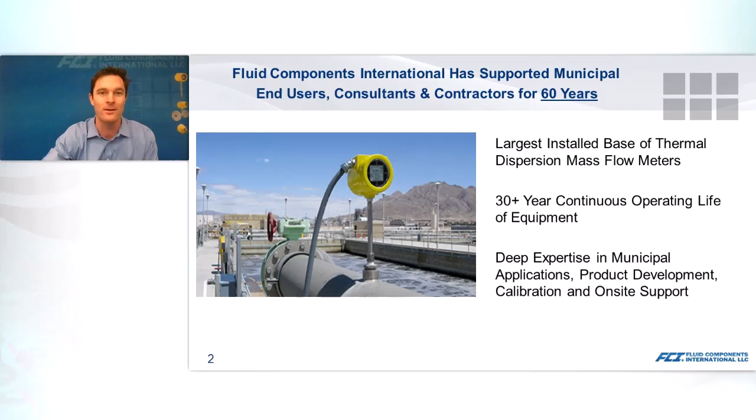So there's FCI in particular. I would say that the thermal mass flow measurement in general, regardless of the manufacturer, has become a very popular option in the municipal industry. You think of those bread and butter applications that are used in municipal, your aeration, your anaerobic digesters, anything that has to do with biogas, natural gas, combined heat and power, flares, odor control. The application list goes on.

Customers, engineers, consultants like to specify thermal in general because, as Travis pointed out, it does give a direct mass flow measurement without compensating instruments for pressure, temperature, flow computers, has a very good, reliable performance in low flow and a wide turndown range. The standard of that is 100 to 1, but with special calibration techniques can go as high as 1,000 to 1. There's no pressure drop.

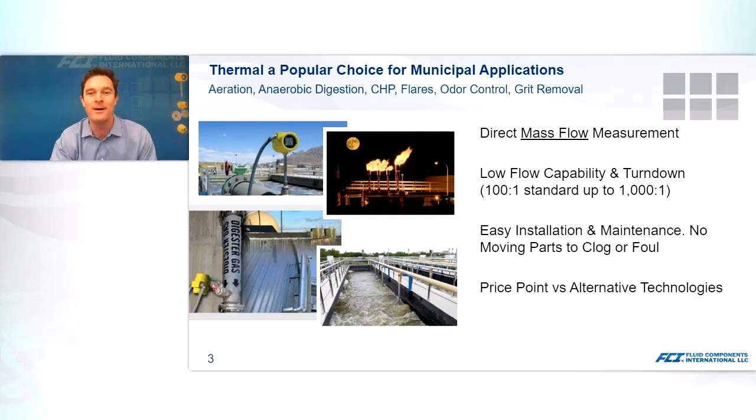There are no moving parts with thermal instrumentation that could clog up or foul. Easy to install and easy to maintain. And the price point of thermal compared to some of the alternative technologies is quite competitive. So thermal has become a very popular option in municipal in particular.

Now, before we can discuss wet gas and the frustrating problems that it causes and how to approach them, you need to understand just a bit about our theory of operation and how thermal dispersion works. So what you see here are two photos of our instruments. The flow meter on the left is our insertion instrument, and that is for line sizes 2 inches and above.

The instrument that you see on the right is our inline, and that's for line sizes 2 inches and below. The main concept that we have is we have two thermowells on our sensor head, and within each of those thermowells are platinum plated PT1000 RTDs measuring temperature.

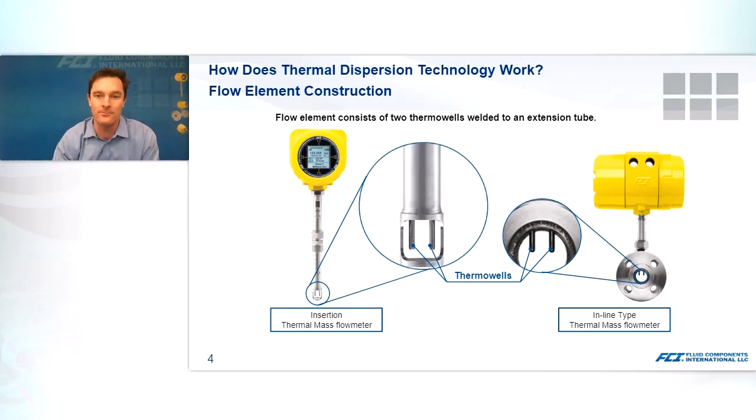Within one of those thermowells, we bring extra heat to the RTD, and that is called our active sensor. And the other one, there's no heat brought to that. That one's just measuring the temperature of the media as it flows by. That's our reference sensor. So two RTDs, an active sensor with heat, and a reference sensor. And at any given point in time, there is a difference in temperature between those two RTDs, and that is our measurement signal.

Now, moving on to how it works in particular, the concept is all about the molecules. It's all about the molecules. So on the left, you see our sensing element. The red is the heated sensor. You have your unheated sensor, and then that delta T represents the difference in temperature. On the right, you see a little bit more dense of a situation. And each one of those dots there is a molecule of the gas that we're measuring. Now, that could be biogas, it could be compressed air, it could be hydrogen, it could be a blend of a lot of different things.

And each one of those molecules that is hitting that sensor head has its own unique cooling effect and is taking away heat. Now, the more of those molecules that hit the sensor head, the more heat will be taken away. And the velocity, the faster that those are moving, the more heat will be taken away. This is the central component of how we work. You have the cross-sectional area of the pipe. You have the density or the pressure, which is how many of those molecules are hitting the sensor head and taking away heat, times your velocity. How fast are they moving and how fast are they taking away heat? There is a direct correlation between that difference in temperature and the mass flow of the media.

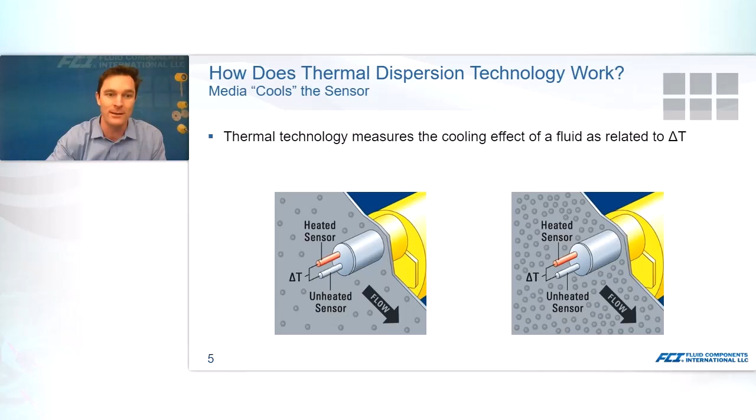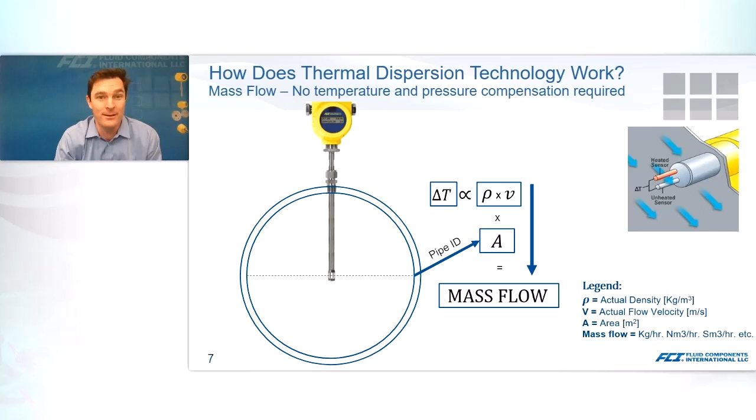Now, because our theory of operation works this way, and looking at the formula for mass flow, which I would say is your density times your velocity times the cross-sectional area of the pipe, and given that we're measuring off of the cooling effect of the media being measured, there is no need for additional compensation for either pressure or temperature or a flow computer. As we said, the number of molecules that are hitting the sensor head is how we make our mass flow measurement. So with that, no need for a pressure instrument, no need for a temperature instrument, and no need for a flow computer.

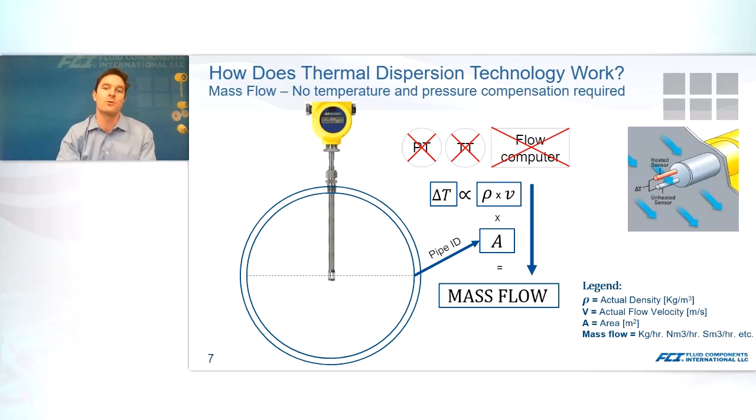Now, as I said, there is quite a bit of upside to using thermal in general in quite a few of the different municipal applications. But one frustrating and expensive challenge that is commonly faced is measuring wet gas. So this is gas with moisture entrained in the gas flow. That's condensation that builds up and droplets that can come into contact with the sensing element. So what does that do? As we talked about, the thermal theory of operation is all about the cooling properties of the media and heat transfer, taking heat and reducing that delta T between the heated sensor and the reference sensor.

And in those applications, like the digesters, very, very common with wet gas, where you have the moisture and the condensation that builds up, you could get moisture that drips down the probe and comes into contact with the sensing element. And when it gets wet like that, that would cause the measurement to spike unexpectedly, and that would really throw off your accuracy. So if you look on the right here, just as an example with a graph, you have on the y-axis your flow rate, that's our measurement, and on the x-axis you have time. Now you have dry, and you see that line is very, very stable within that plus or minus 2% tolerance.

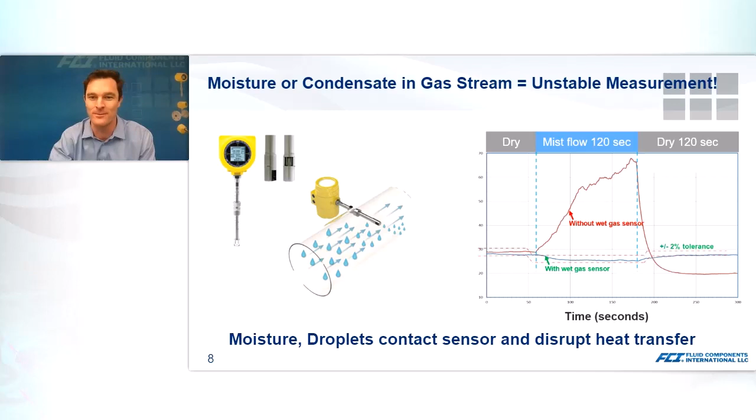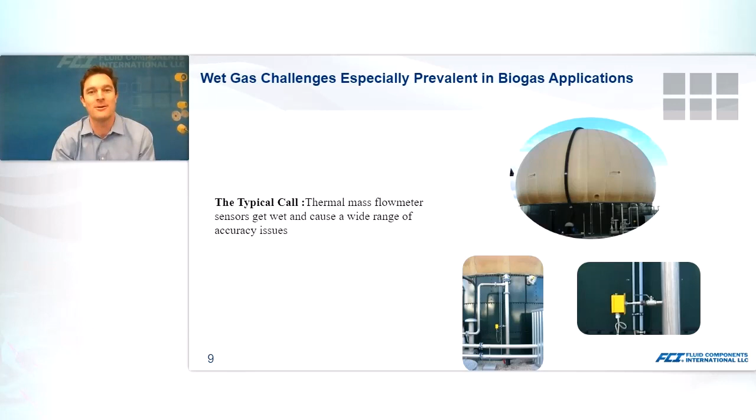Now, as I said before, this is very, very common, particularly with the anaerobic digesters and in the municipal applications. The typical call that we get is: we have a thermal mass flow meter, it's in a slightly wet gas application, and we just simply can't make an accurate measurement here. So this is routine for us. We see it all the time in this industry.

And what I would like to speak about today are just good practical measures that anyone can take to get a good, accurate, reliable measurement in a wet gas application. So the three focus areas, or the three recommendations that I have just in this short time here. Number one, use a gas dryer, use knockout drums, use insulated piping. Install those upstream from where you're making a measurement. That'll knock out quite a bit of the moisture and make the overall environment more conducive to an accurate measurement.

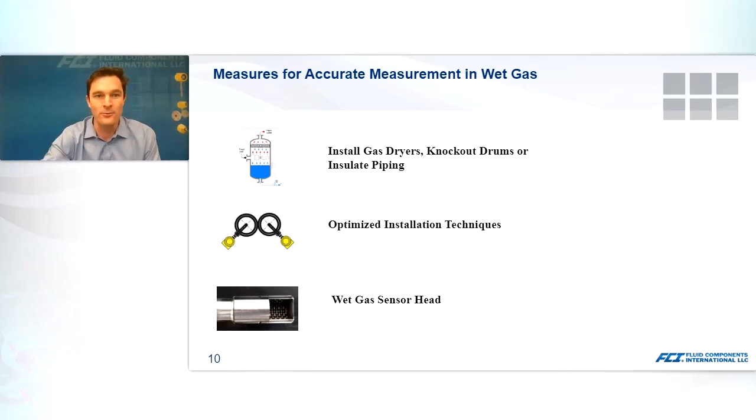Number two, in scenarios where moist gas condensation is still present, we have a couple of techniques that are pretty straightforward as far as optimized installation. And there are certain manufacturers, FCI being one of them, that do offer mechanical options to help get an accurate measurement in wet gas applications. So I'll talk about the first one. The first one that we have is that optimal installation. And the rule of thumb that I always communicate is install in a way that you make gravity your friend.

So on the left, you see a picture of a sensing element with a water drop. And in many cases, that's a teardrop if you want to have an accurate measurement. And the goal is to keep those droplets and to keep the moisture from coming into contact with the sensor head. Now on the right, we have a diagram here that you see gravity is pulling those droplets down in that thumbs down scenario right onto the sensor head, and that thing is going to spike. You're not going to get an accurate measurement. That is an easy way to prevent a problem.

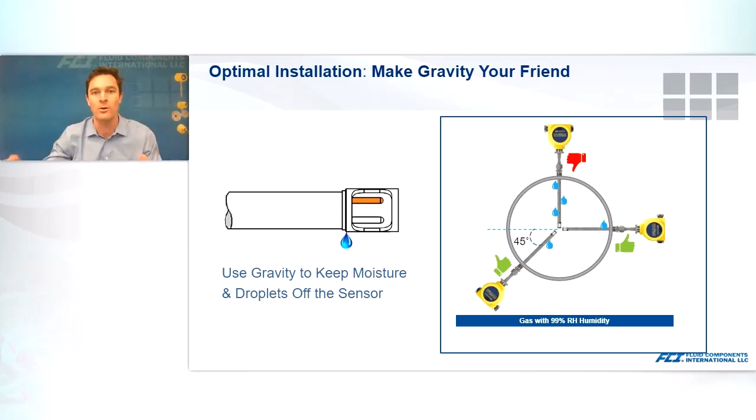What you see in the two thumbs up options are a 90-degree installation and a 45-degree installation. And where you would have had droplets of moisture being pulled down by gravity, that is simply no longer easy, allowing a droplet or moisture to come into contact with the sensor head. So let gravity be your friend in moist applications. It is not a best practice to install a flow meter at 12 o'clock directly down into the mass flow. Install it at 90, install it at 45, let gravity be your friend.

Now in practice, here are some great examples. I saw both of these and I smiled. You'll see on the left that we came in at 90 degrees, making us therefore less at risk for having our accuracy thrown off. And the cool thing about that picture on the left is that in this digester application, there's a walkway, and the technician can now see the flow meter and the display on that flow meter right at 45 degrees without needing to turn his head at an awkward angle. So note the 45 degree rotation for easy viewing by folks who are working that facility.

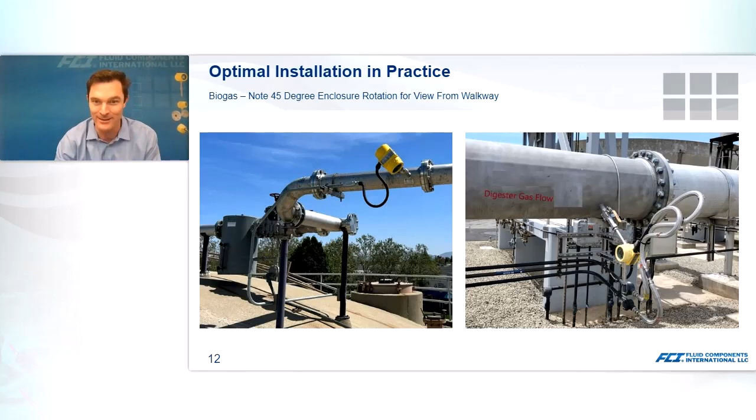On the right, we're installed right at that 45 degree angle and making gravity our friend. The thing I would point out there is there's use of a ball valve and a packing gland, which makes it very, very easy for anybody in the facility to take the meter out of the process, to clean it, to maintain it, and to install it right back in with the quarter turn of a valve.

Moving forward to our other option, and that is the wet gas sensing element. FCI is the first manufacturer, and the only one, to use a wet gas sensing element. What that looks like is what you see right here in that top picture, where you have the two RTDs, and then on the other side of the sensing element, on the inlet, in a digester type application, you have a metallic shroud there that will work to shunt moisture away from the sensing element and not let the moisture spike your reading. So how does that work?

Well, the gas with droplets comes in, and that wet gas head, that mesh screen, will shunt the moisture away. There is a small vent here. If you look at the bottom picture there, the water will vent out of that, and you're able to make a nice dry measurement of the media without being thrown off.

So we're going to go back to this graph on the right, which shows the red line, which is what happens to a measurement without a wet gas head with mist flowing for 120 seconds, compared to that blue line on the bottom that shows what happens to our measurement when we have 2 minutes of a mist flow test. So in practice, we could look at a graph. I think that if a picture says 1,000 words, a video says maybe 10,000 words. We do have a video here that we'd like to show.

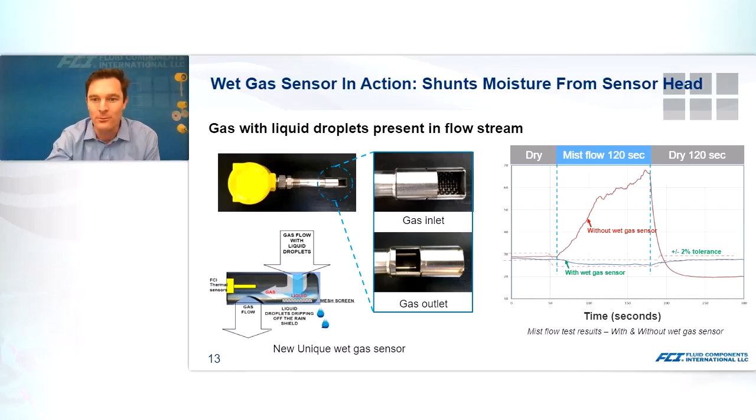So here's a video. We have a mist that we're introducing to our gas flow stream. We have our flow meter installed at the proper 45-degree angle here, and you can see the readings as the mist goes up. You can see that we are stable. We are within that plus or minus 2% of tolerance, and you don't have big, massive spikes in the reading. So in practice, in reality, the mesh screen, the wet gas sensor, shunts moisture away and allows for a good, stable, accurate reading where you might be thrown off if you're not using this as an option.

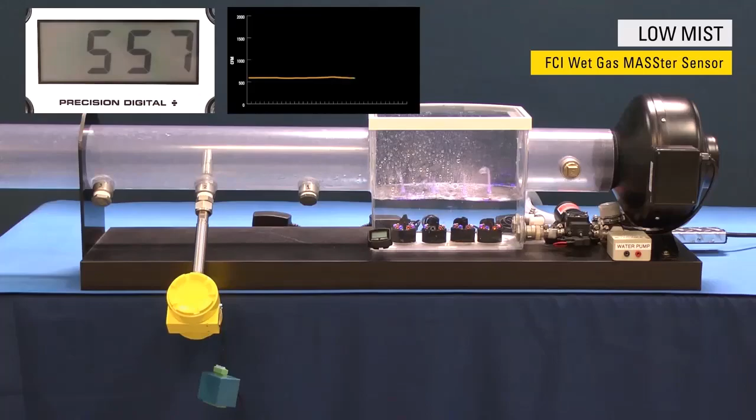And one thing that we hear and see in industry is operators might ask us, well, what about using high levels of heat and really heating the device to a temperature that would flash off moisture? We've seen this out there. This is not an option that we have decided to take, and it is not an option that we recommend. What it typically looks like is you will have the device heated up to 300 degrees Celsius or 572 Fahrenheit to flash off the moisture. We have not opted to take this approach.

For one, we are concerned that it could create an unsafe working condition. For two, it consumes a lot of energy to operate the instrument. And all that heat, if you think about the electronics in the instrument, we worry that it would shorten the operating life, prematurely age the instrument and make it susceptible to drift. So the high heat, not something that we advise.